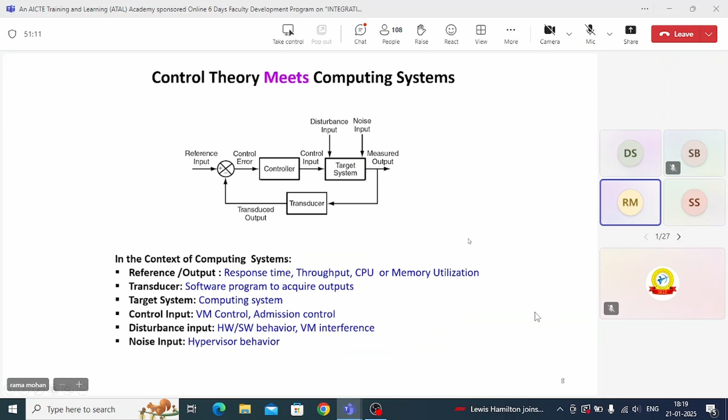And the solutions are being found day after day. So, therefore, we use control systems to have a kind of closed loop system wherein you want to see to it that any user requesting for a cloud service gets it, via some feedback loop. These are all control system basics which I don't want to get into now.

So generally a cloud setup, if you want to do it in a private space, for example in your college or possibly in a small working environment, you can do like this. So this is the architecture of the cloud.

And all these machines - the cloud controller, cluster controller, and the node controller which hosts the machines - are time synchronized by NTP service, meaning Network Time Protocol Service. Because there is information exchange between the cloud controller, cluster controller, and the node controller, they should be connected with the same network for time synchronization. Therefore we use the service called NTP.

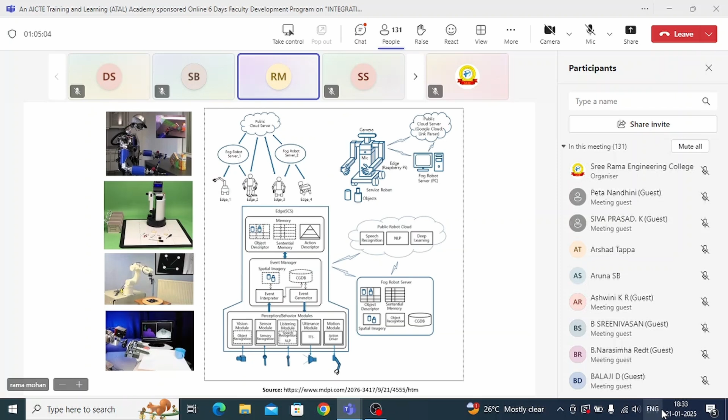So the operations could include pick and place, decluttering. Decluttering means you mix up a set of objects and give it to the robot, and it is going to separate them and give them back to you. Even though it is not a great operation to do, it is just for a certain type of training.

So now, if you want to really have an architecture for the robotics kind of environment, or a cloud robotics kind of environment, the only thing that changes is, as you can see in this diagram, there are two parts: one is pre-processing, one is post-processing. There are several robots here, and you have the robot vision data, which could include a lot of information related to the images.

That data gets pre-processed in this server called the Fog Robotics server, and is finally sent to fog computing for one layer of processing. Some part of the processing of the robot vision data could be accomplished in a fog environment, or sometimes, if it is really powerful, the whole part of it can always be processed in the fog environment. If it is not so, then you balance the load across the fog environment and the cloud environment.

Both, okay. This is the cloud environment, this is what I was describing previously - this is the complete architecture of the cloud environment. This is fog, and for each fog you can see the modules - they could be kind of microcontrollers, Arduino or Raspberry Pi. This is very transparent.

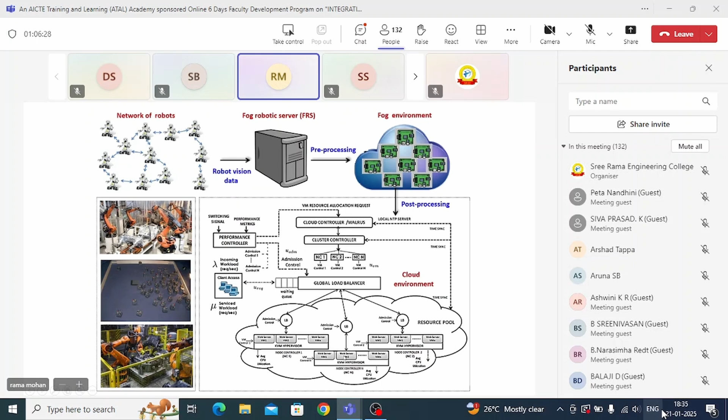Now the whole logic runs like this. The whole control loop is called sense, think, and act. That means you are sensing from the real world by means of some sensors, and then you think. Think means you are running some algorithm, and then based on that you are going to act on the system. This is what that means.

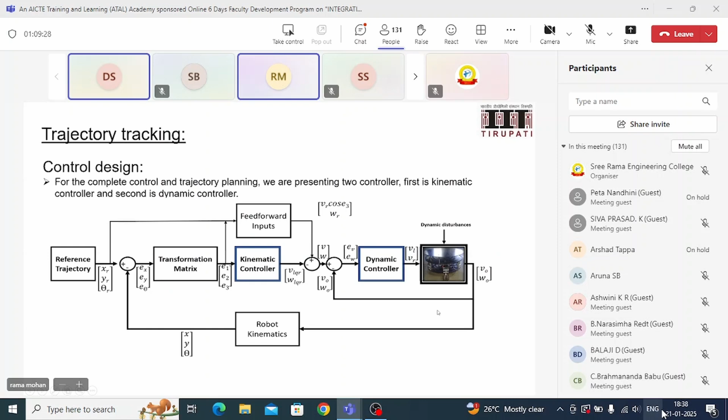This robot would carry a kind of camera which can capture the environment. That is the way we developed this application. We tried to see that we follow different paths, one being the elliptical path, and then we tried different controllers.

Even though I'm not mentioning any control logic here, for tracking we follow LQR plus state feedback, LQR plus H infinity control, or SLQR plus H infinity. SLQR means switched LQR and H infinity control. These are some path tracking algorithms which we've developed, and the error tries to reduce as we go to a more complicated controller from the left hand side to the right hand side.

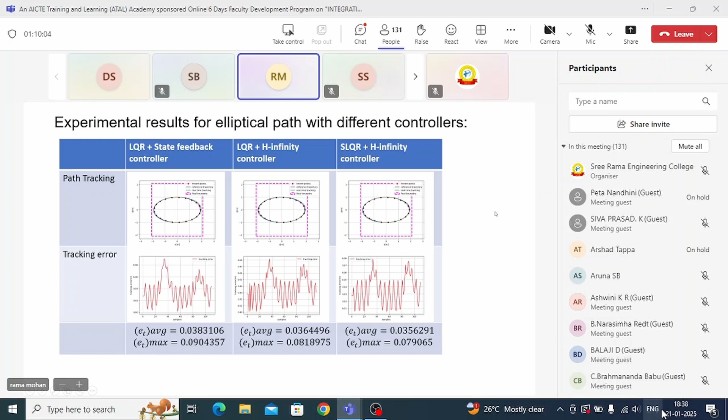For fog computing, even before we got into the shopping mall application, what we tried to do is first take a mobile robot like this with a very simple camera, and of course a computer to see what is happening from this camera. So to view what is seen by the camera, this computer is being used, and then we have certain colored balls and a Raspberry Pi.

So if you see this application, first what we did is we made a boundary like this. I hope you are able to see this slide on preliminary results of object mapping. Are all of you able to see?

So when we are using this setup, this mobile robot is given a path to trace a simple square, and in between you have these balls with different colors. What we did is we tried to move the robot from the initial position back to the final position, which is the same as the initial position, after tracing this trajectory.

So what is the difference between the results we observe? There are two types of things we have done. One is using onboard computation of the mobile robot to process the images of the environment, which are monitored at each point in time as we travel this trajectory.

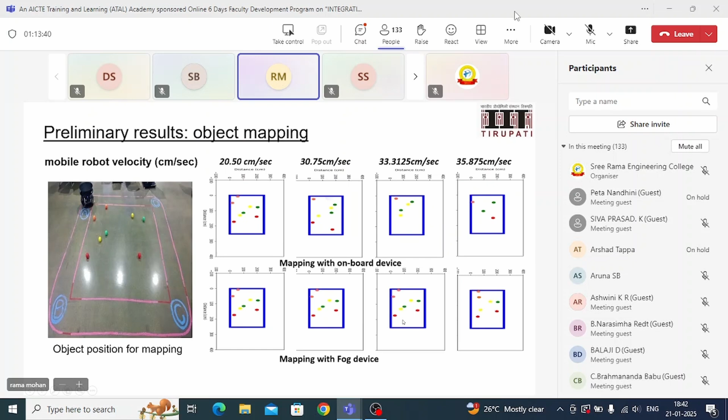Now what we see is, if I use a single onboard controller with a mobile robot in the same environment just discussed. I hope you are able to see the slide in the background, right? Single board controller and all that.

Yes sir, okay fine. So if I use single onboard controller, it means I am using the onboard computational facility of the mobile robot to capture the environment surrounding it. In such a case, processing time is much above the threshold time.

Now what I would do in such a case is distribute the image frames across several Raspberry Pis instead of just one. In that case, the amount of time required to detect an object in the surrounding of the robot is much less.

Then there is a question: why do you want to use so many Raspberry Pis here? Because the quality of the image is going to get distorted due to several things, based on the camera, based on the speed, and so on.

So all this processing has been divided into multiple AI algorithms, and all these AI algorithms are organized properly and uploaded onto each of the nodes of the fog. Node 1 is one fog device, node 2 is another fog device, and so on.

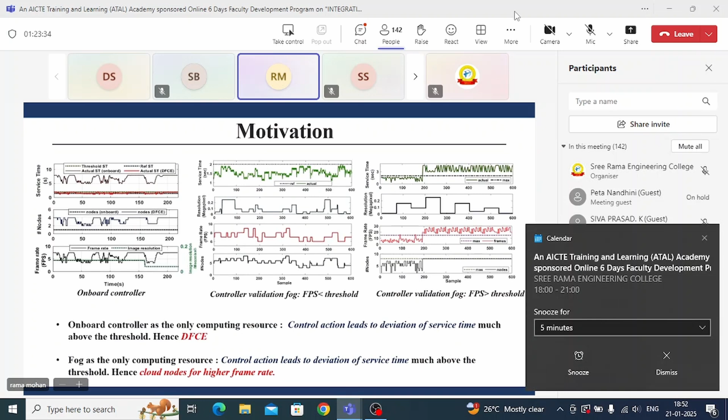So these are a couple of slides mainly focused on the theme of this FDP—the topic which I am talking about, so please pay attention. So that's what I just talked about—this is all the control part. I'll give the paper reference so that you can have a look at it.

These are the types of items which we try to train. It's not just that the TensorFlow algorithm will directly take care of detecting these objects—you need to train different types of items. There are several items, around 30 to 40 item lists, trained for TensorFlow, and they have been hosted on the fog and cloud environments. That's what we did actually.

Now this is the schematic diagram of this. I don't want to get into it because it's an algorithm that probably needs detailed explanation. But the only thing I would like to tell you is that we have developed several load sharing algorithms, used for diverting the load across the fog computing environment and cloud computing environment, so that the service time could be kept within some reference value.

Finally, what we did is we tried to run the whole thing, which is the real-time validation here. It shows a working environment of a shopping mall wherein the mobile robot moves from one part to the other. These red marks—I hope you are able to see the controller validation plots—show the application environment.

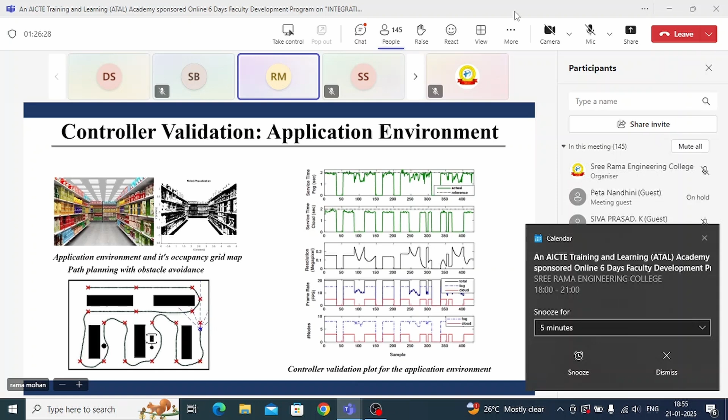Distribute this load across the cloud and fog environments. The number of nodes in the fog environment are shown in blue in the last plot here, and the number of machines used in the cloud are shown in the red plot. This is a kind of validation which we did in a shopping mall in Tirupati, and we published it in a top tier 1 journal in robotics called Robotics and Autonomous Systems. You can see the paper, I'll also share the link.

So this is a kind of control, navigation control loop which is used for the mobile robot. So what did we do here? There are a lot of things involved. We tried to mathematically model a fog computing environment, and then slowly develop a controller so that the controller understands the dynamics in which the fog computing environment changes with respect to the nature of the computing environment.

For example, the image frames are changing, image resolution is changing. How does the service time change when the number of nodes are changing? That information is captured in the mathematical model, and we describe it as an LPV model. LPV means linear parameter varying model. Right, this is what it means.

So once we have the LPV model for a network of fog nodes, which we also call the distributed fog computing environment, DFCE, or distributed computing environment, we develop this controller called LPV controller, which is linear parameter varying controller. And we do all this to ensure that we get the service time to be below a certain value.

Let me conclude this part of the lecture properly. So what did we do till now? We tried to understand cloud computing, then we talked about fog computing, which is a milder version of cloud computing. Cloud computing means virtual machines. Fog computing means we use lesser computational power like Raspberry Pi, Arduino, or a microcontroller.

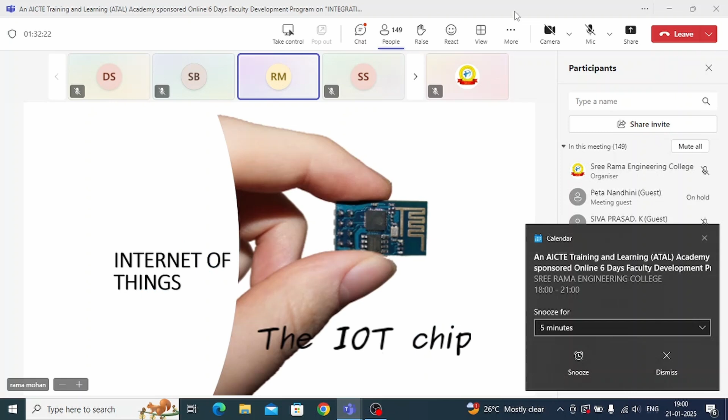Now, Industry 4.0 has come up with different kinds of industrial revolutions. The fourth industrial revolution is the current one. So the fundamental part of the industrial revolution and Industry 4.0 is the IoT, the Internet of Things. It's a simple IoT chip which we can talk about.

Now, what is Internet of Things? It is a network of physical objects, devices, vehicles, buildings, or any other items, embedded with electronics, software, sensors, and network connectivity. It enables these objects to collect information. So when you talk about the fundamental thing, that is...

You have a device. If you go 40, 50 years ago, we never had IoTs, right? We just had a simple sensor. For example, to measure temperature, we could have used RTD, which is resistance temperature detector. Now, RTD by itself cannot exchange information with any computing device, like cloud and fog, for example. Today it cannot directly interact with RTD.

Now, for example, if today you need to interface RTD with the cloud and fog, that means the information from the RTD, if we have to pass it on to a fog environment or cloud environment, what should it do? We would have to develop all the signal processing of the data which is coming out from the RTD.

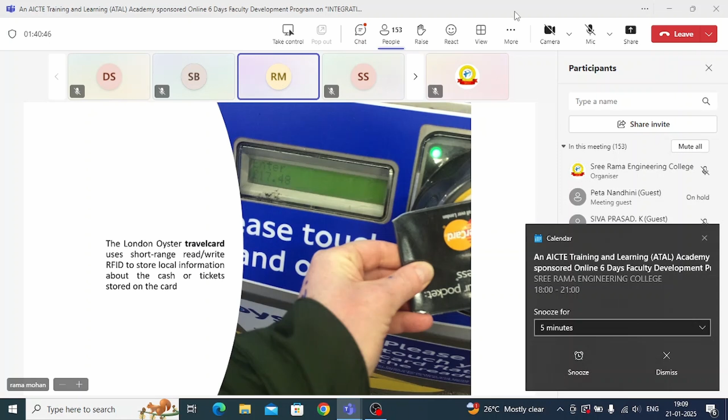So there are devices which are used for checking the location of where your pet is, like a dog. If you are having a dog with you, possibly if you want to check where it is in a given space, the network has an RFID tag and so on, for a live location tracker and so on. Then travel cards is one such thing—magic bands in Disney, wherein you can enter some places with a band.

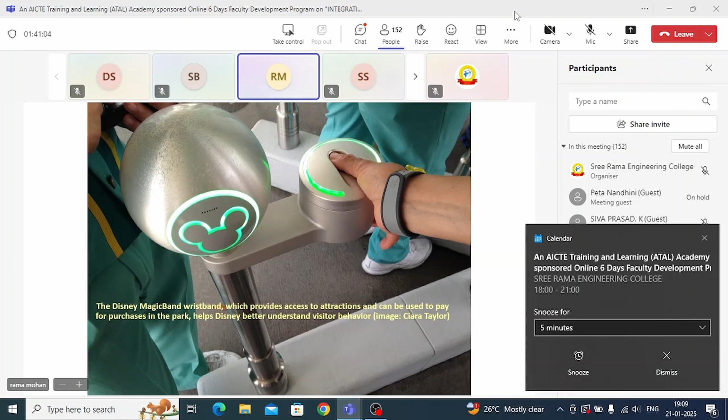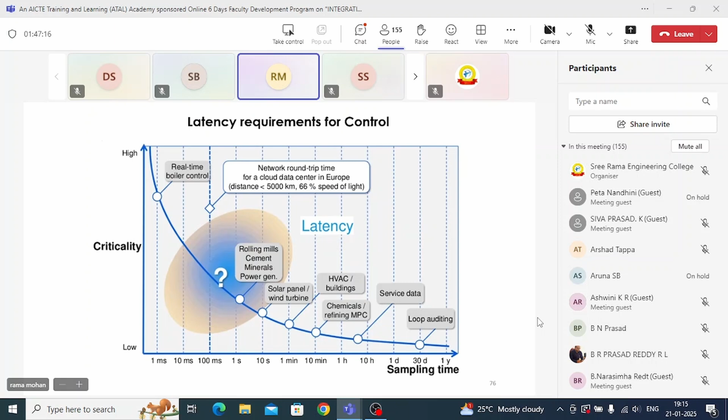Now look at the industrial automation applications. As I told you, in industrial automation we use something called advanced process control and SCADA. These two are the most important industrial applications.

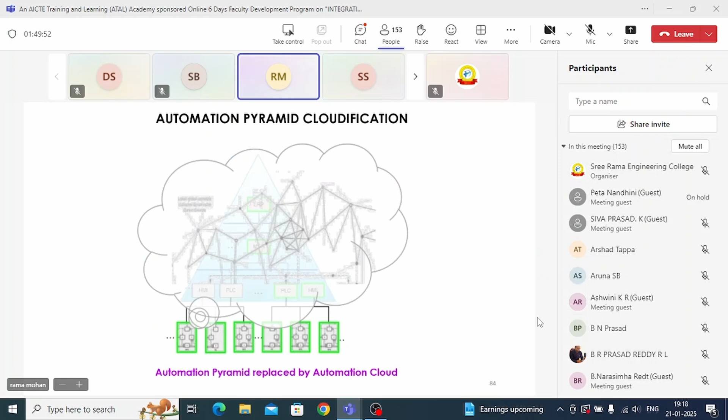So this is the cloudification of the entire platform. That means you don't have physical hardware. All the information which you get from these devices in the bottom layer is being transferred to the upper layers, where all the control takes place.

Now, if you want to do the control, it depends on the plant. If the plant requirements have low latency requirement, you can never apply cloud. If the latency requirements are high, let's say 5 seconds or 10 seconds, then of course you can use cloud, because the closed loop feedback control will require such kind of arrangement. This is cloudification.

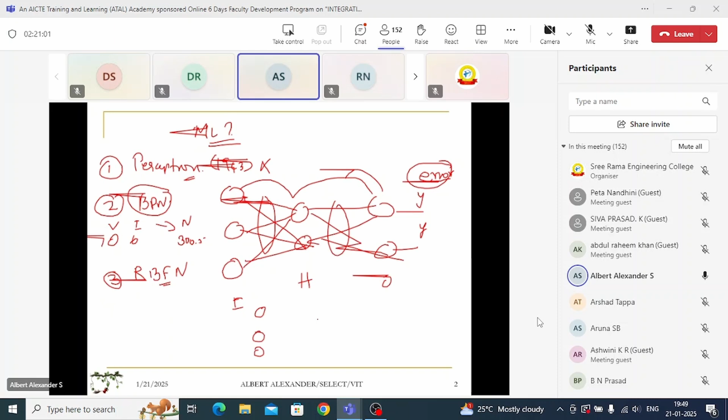The radial basis function network is similar to back propagation. It will have the input, some hidden, some output, but unfortunately this radial basis function network does not have any weight calculation between these layers. The weight calculations are made only between the hidden and the output junction. Here we never call it a hidden layer; we call it receptive units. These receptive units follow the Gaussian structure, which is multiplied with my input parameter, giving some kind of function, normally called a nonlinear function, which is helpful.

Now let's talk about LSTM networks - that is, if you're going with a time series. For example, we are not going to take just one particular data point of a battery and come to a conclusion. We will take different intervals, like time t1 to t2, for a particular battery's voltage parameter, v of t into differentiation of omega t. So omega will not come in, it's v of t into dt. For this particular thing, for the different average value, we can go for the LSTM. So the root cause for the LSTM is going to be the RBFN.

So we can work with RBFN or LSTM for these kinds of problems. For a particular range, there is one major objective, and that objective is called prediction.

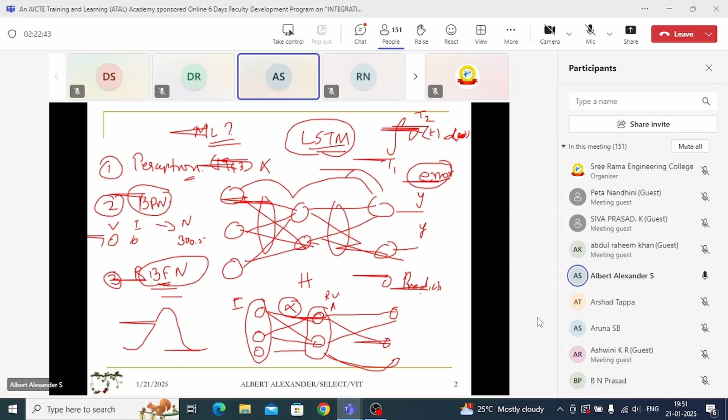You have to decide which part you are going to focus on: prediction or forecasting. Prediction is different, forecasting is different. Prediction means I want to predict whether a fault is available or not, using the present dataset and the past dataset to predict the future. That is called machine learning.

So for prediction there are some algorithms; this is normally called prediction. Forecasting means, at present you know your VA rating, and in the past you know the VA rating, and you can forecast what rating is required in 2030. That is called forecasting. So if your work seems to be forecasting, there are some algorithms which deal especially with forecasting.

So let us talk about... just a minute, I will come back, just a minute.

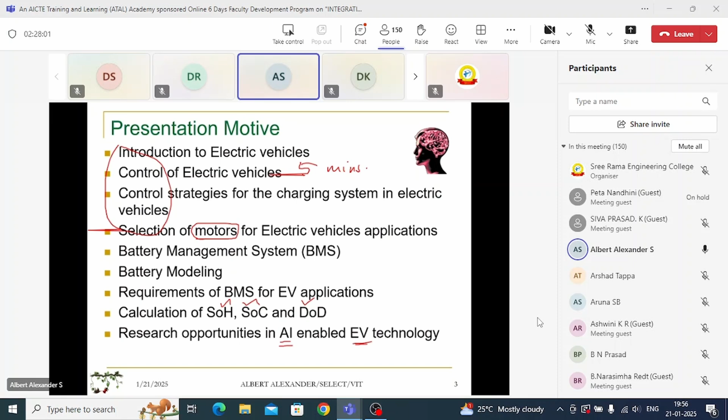So this is the introduction of what I need to deal with.

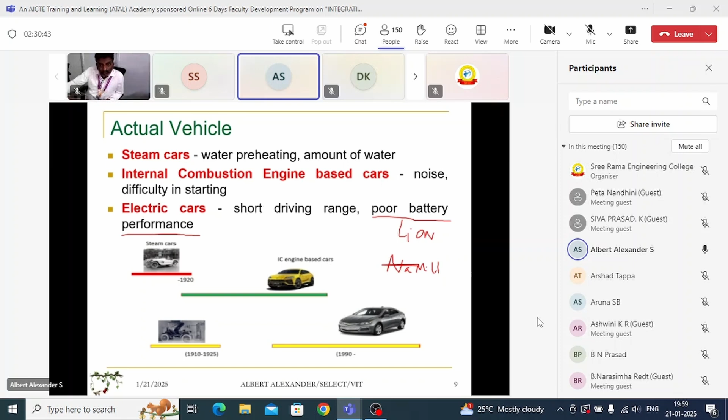So here let us talk about steam cars. One of the major drawbacks in electrical vehicles we know. As of now, in my presentation, I'm going to focus on four wheelers. The major issue is the short driving range, and one of the drawbacks of electrical vehicles is poor battery performance. Even though we use batteries like lithium ion or nickel metal hydride, these batteries have poor battery performance with respect to long driving range. That is the motive of today's lecture.

When we talk about definitions of the electrical vehicle, it's called an electrical vehicle because it uses electrical motors - that's the reason for the name. The battery electrical vehicle means one powered by battery, hybrid vehicles have both batteries and engines, and plug-in vehicles are ones that plug into the grid.

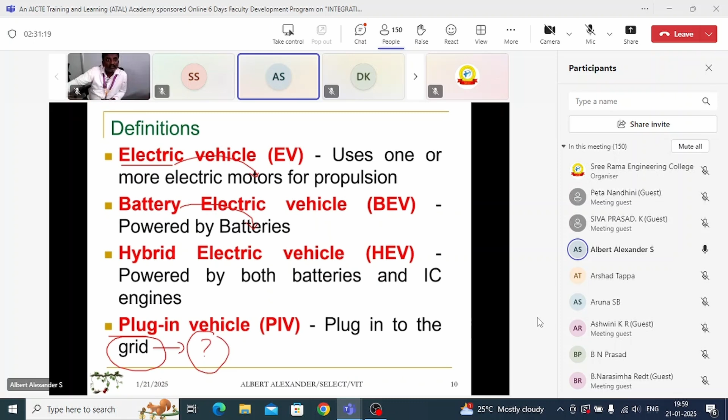I'll just make a note of the electrical vehicle and skip ahead. In my textbook, I have briefed a small history.

I will take just 2 minutes to explain the brief history of the electrical vehicle. Whatever we speak about the electrical vehicle at present, it was already developed more than 150 years ago. It is not a novel concept or idea, because whenever we publish a paper, editors expect novelty. But we should understand that the electrical vehicle, whatever we are projecting, is not a novel idea. Whatever block diagram we speak of at present is not a novel thing - it has already been developed more than 150 years ago. The only novelty we can bring is on the control side, a control algorithm, or in machine learning parameters, just to improve performance. We are not developing a new thing, just making improvements - what we normally call a fundamental or incremental addition to the available knowledge.

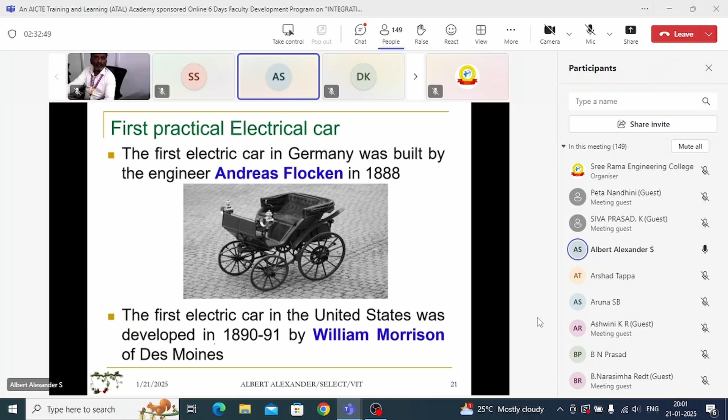Even now, I can see many research papers that come to me for review, because I'm on the editorial board of some Scopus and IEEE transactions. Some people are still submitting papers on battery swapping service stations. Even the Ola autos in Chennai use this exchangeable battery service, which they call a battery swapping system. But you should understand that this battery swapping system has an old history, more than 150 years.

We can understand that this exchangeable battery service is an old thing, but for this old thing, what additions can we use? That's what we're going to discuss, because speaking about the whole history alone will not make it a very big thing. So we can understand what merits are related to it.

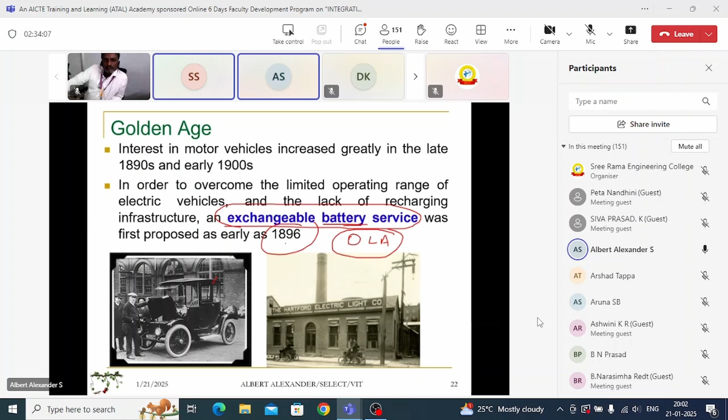Now for the dual active bridge battery charger, we are developing something around an 80 kilowatt charger, and also working with a 40 kilowatt charger. We can see the percentage level of this 40 kilowatt and 80 kilowatt we are doing. Normally people work with small prototypes, something like 3 watts, 3 kilowatts, less than 1,000 watts. But the actual requirement for the battery charger, if you want to develop it, should be 40 kilowatt or 80 kilowatt.

I will also give you sample calculations for this 40 kilowatt and 80 kilowatt. For this particular power rating requirement, we want to make use of power electronic switches, specifically MOSFETs. That's the reason many people are shifting from silicon switches to silicon carbide.

Why are we going for SiC MOSFETs? Silicon MOSFETs cannot withstand high power, that's the reason. There's no very big magic here, because the power rating level is going quite high. Why is the power rating level going very high? Well, the main reason is the motor that is available.

How do we figure out this particular motor? This will be estimated by the mass of the vehicle. How do we predict the mass of the vehicle? I will tell you with the help of a simple vehicle dynamics calculation.

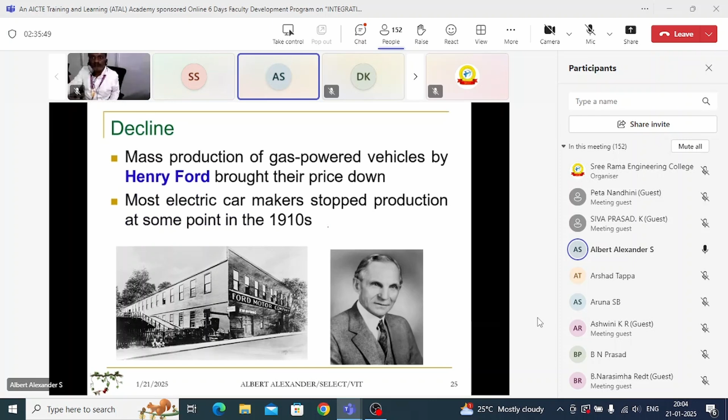The electric starter was developed in 1912, and then Henry Ford came into the picture, and the electric car production stopped. This is the small timeline history of the electrical vehicle, which started in the 1830s and dropped in the 1910s, which we normally call the golden time period for electrical vehicles.

But now comes the question: what was the need, and how did the electrical vehicle make this revival? What made this particular revival happen? I will tell you. In 1968, there was a great car race.

We want to teach these things to our students, so that they can understand what various developments occurred in the history of the electrical vehicle. Because whatever we teach at present relates back to these things.

For example, whenever we talk about electrical vehicles, we can see that the great car race started between Boston and California. It was a cross-country race with electrical vehicles, a joint collaboration between MIT and Caltech, an energy organization collaboration between these two organizations.

So here we can able to understand that this project was highly successful. They used a typical amount of batteries and 53 charging stations, which were spaced about 60 miles, and they reached Caltech. So that has been a revival for the electrical vehicle. This is myself, when I visited MIT for my postdoctoral research in the US, I visited places there having this particular thing related to EVs.

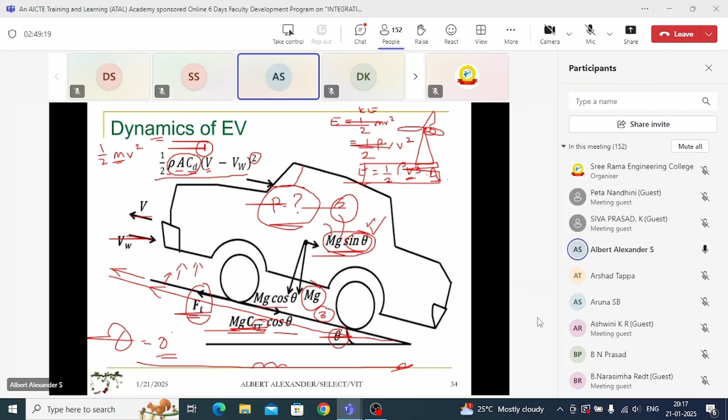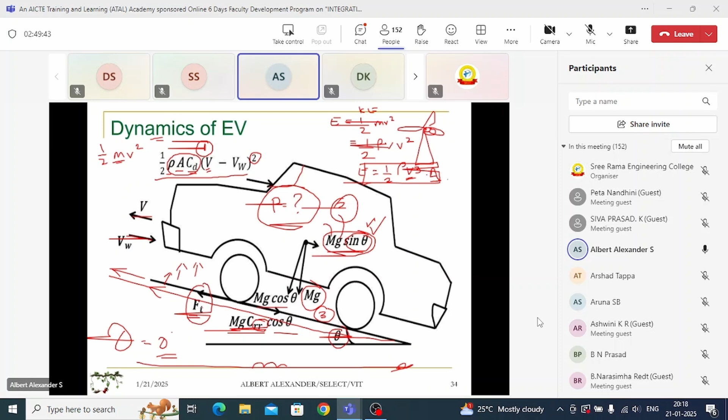So like in mini projects, we cannot just conclude that our battery is going to be something like 12 volt 100 Ah, some kind of thing — no, that is wrong. We have to decide properly based on various things. These are the various aspects related to the design of a power rating, and only then can we decide the force. Now we are going to take a force balance equation.

So the force balance equation of any vehicle will be given by m alpha is equal to Ft minus summation of the total resistive forces. Fr stands for resistive forces, and Ft stands for the traction or propulsion force.

There are three forces acting as resistive force, acting opposite to the movement of the car. When the car is moving this side, there are three forces acting in the opposite direction: force number one, force number two, force number three. I want to add all three forces, that's why I give it as summation of the total resistive force.

Now I want to calculate Ft. How to calculate the value of Ft? By this force balance equation, I can write that Ft will be equal to m alpha plus summation of Fr, because Ft means I want to calculate the total traction force or total propulsion force. So Ft will be given by m alpha plus summation of Fr, which is the total of the three forces.

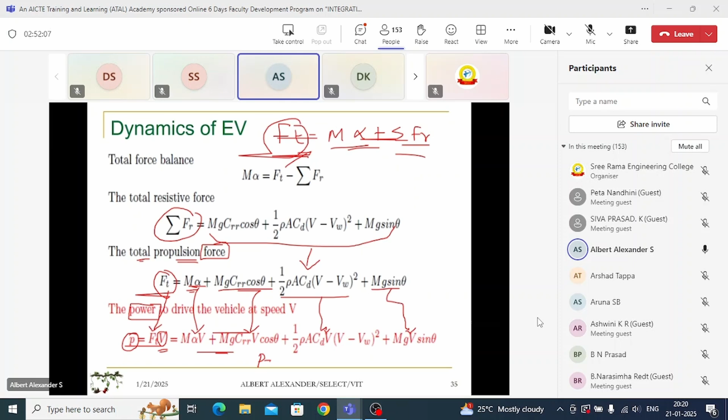This red color equation is required in order to calculate the force. Whenever you are writing a paper for any kind of vehicle, we have to include this equation to make people understand why you have taken a 40 kilowatt rating or 80 kilowatt rating of a vehicle. So for this I made one simple calculation, but I will share this presentation to Munishankar sir, so he will give it to you.

You can see that we have taken a sample calculation of mass equal to 1000 kg, and let us say speed is equal to 100 km per hour. This is our requirement. As I already mentioned, the power equation is equal to Ft into speed. So this is the equation I showed in the previous slide, and I want to substitute mass equal to 1000.

Alpha is equal to 0. For example, if you have some vehicle dynamics data with some alpha, you can substitute the alpha value also. If you substitute alpha, some 1 kilowatt will be added. For example, if you take an alpha value between 0 to 1, say alpha is equal to 1, then 31 kilowatt will now become 31 plus 1, it becomes 32 kilowatt. That's all. And m stands for mass, and gravity is given by 9.81.

A normal gravity, and CRR is a constant 0.02, cos theta means I've taken theta equal to 0, cos 0 is equal to 1, so I've not included it, and 1 by 2 is given by 0.5. Rho is air density equal to 1.2 kg per meter cube, and I want to calculate the different set of values, that is the area. The area here is given by 2 meters square, it's a frontal area. As per your vehicle design, if you want to vary the front end area of the vehicle, you can give it, and the drag coefficient, and V minus VW. Here the speed is given by 100 km per hour.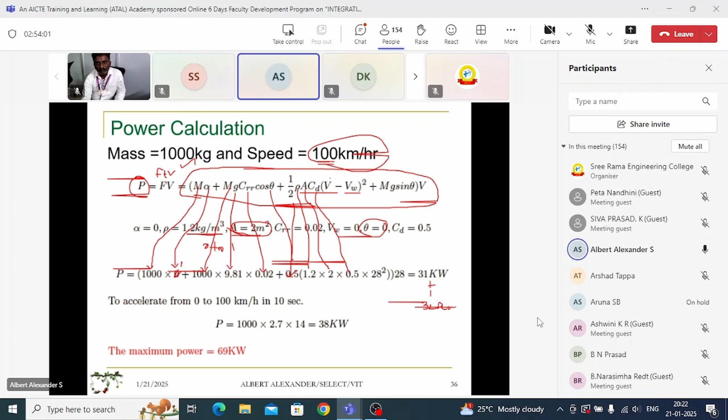So this 100 km per hour, I want to convert to meters per second, because these equations I want to talk about with meters per second. So how do you convert 100 km per hour into meters per second? You have to multiply by 5 by 18, that will give you meters per second. So you will get 0.277, multiplied by 100, you get 27.7. So I am giving it as 28.

So I am considering the speed of the vehicle equal to 100 km, and the headwind speed VW I am assuming as 0. So 100 km per hour minus 0. This 100 km per hour converted to meters per second will be 28. And then mg, m is equal to 1000, g is gravity, sin theta. Theta is equal to 0, so sin 0 is equal to 0. So I'm not going to include this particular term for the force balance equation.

And again this V, this equation is enough to calculate what is the power requirement. So the total power requirement for your vehicle, power requirement for the propulsion, is equal to 31.

So like this only, I have given the expression for the normal vehicle. If you want to make this for a different set of vehicles, you assume some parameters, and for that assumption you have to calculate. You can ask me, sir, you have given values of 31 kilowatt, or 30, or 32, or 40 kilowatt, how can you prove these are the actual values for the vehicles? I will prove it very soon.

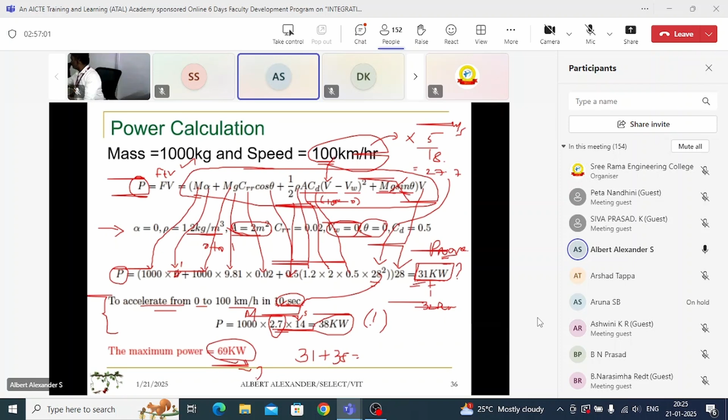So this is the initial requirement, such a way that I'm going to multiply only the available parameters, mass multiplied with my speed divided by 2, half of the speed, and then for the initial requirement of 10 seconds, that is 2.8 divided by 10, I'm going to make it 2.7. So whatever requirements we are giving, we use that. So 31 plus 38, I am getting 69. So totally, I want to design my EV for 70 kilowatt. I will prove how the calculations seem right for different sets of vehicles.

Let me skip these things. Let us say I have taken some kind of comparisons with other sets of vehicles.

I'm not here explaining how the electrical vehicle works, because everybody knows, even school-going children know how the electrical vehicle works. But here, as a research paper or researchers, what works are available? What unlimited works are available over here. I will also showcase some of the works we are doing at present, because we have only 30 more minutes, so within this time I want to give maximum inputs.

So whenever you take a Nissan Leaf, it's one of the vehicles. I will take an analysis only for the powertrain. Powertrain means which are the power components. Why is it called a powertrain? Train is not the word used for our normal loco train or passenger train. Train is a connection of components, called a train. That's all. Powertrain means how the power transfer is taking place within the electrical vehicle. So this powertrain consists of the electrical motor.

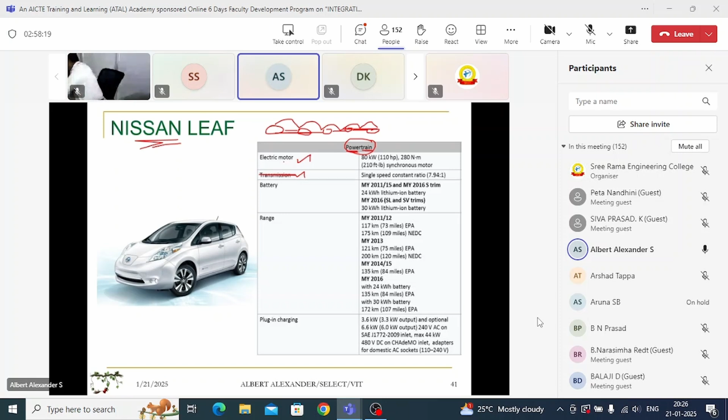We normally have an electrical motor and a transmission, how the mechanical force from the motor is given to the wheels through this transmission. For example, you're having a motor, and the force is directed to the two wheels through this transmission line, like a power transmission line. Similarly, a battery exists, with different ranges and plug-in charging options. So here you can able to understand.

Let us talk about the Nissan Leaf. The electrical motor rating for propulsion uses an 80 kilowatt motor. At present we are designing an electrical vehicle charger for the industry, and they have requested it for 80 kilowatt because of this motor rating. Similarly, the battery which helps in charging this vehicle is given as 24 kWh or 30 kWh.

This depends upon the different varieties or different models. Then there's the range, the different range estimates like EPA or NEDC, these are some of the standards for how many kilometers it can travel on a single charge. Also plug-in charging with different sockets. I will give you some inputs related to research we have done, especially on the charging sockets.

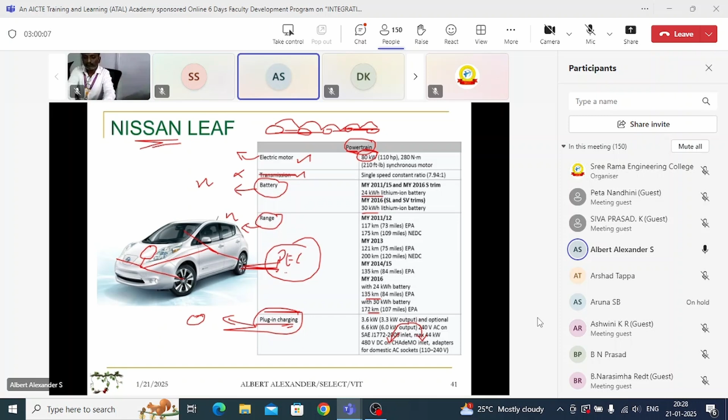So I can refer many people. You can do some work in electrical motors, transmission has only limited work, battery has n number of works, range calculation has n number of works, and especially charging sockets, the optimal choice of sockets, since chargers are required for charging this. So other than transmission, we can do n number of works. I have not included the power electronic converter in the middle because more work has already been done with the power electronic converter, so we can focus more on improving the performance of these vehicles.

Let us talk about the BMW i3. We know that electrical vehicles replace the engine with a motor, but the BMW i3 has both features, an engine is also there and an electric motor is also there. So we target only the electrical motor. We have to design the battery charging infrastructure for 125 kilowatt.

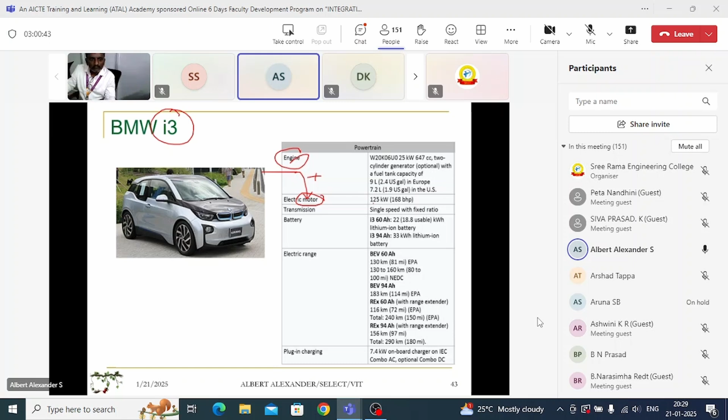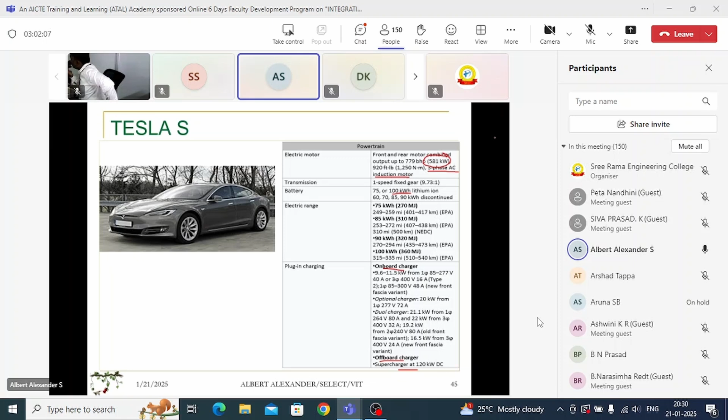Let us talk about the Tesla S grade vehicle. Here the motor they are using is a three-phase AC induction motor. For example, whenever you are teaching a subject like Machines 2 or AC Machines, you can just show that Tesla S uses a three-phase AC induction motor, with a total power rating of about 581 kilowatt. With the help of this comparison, we can understand the variation in kilowatt between all these vehicles, and make this analysis through price comparison, meaning what is the total rating. If a vehicle has better performance because it's a high performance three-phase induction motor rated at 581, and the battery is about 100 kWh, all lithium ion, with plug-in charging consisting of onboard charger, offboard charger, and supercharger available, these are the additional features that make this vehicle outstanding compared to others, because the investment for the motor is more for this type of machine.

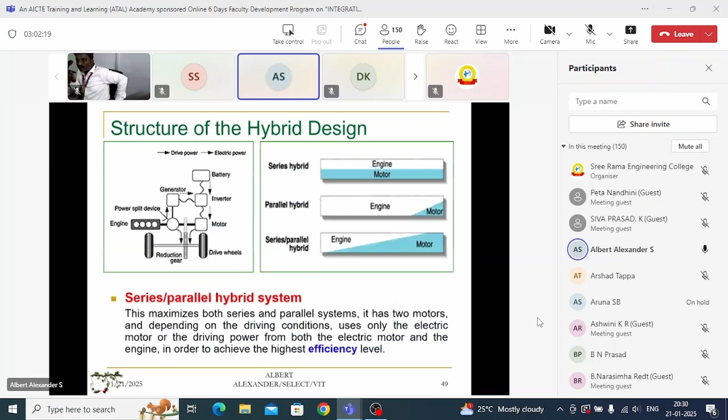So I'll just skip the design of the vehicles and the objectives of the electrical vehicle, I'll skip that basic theory.

There are two different types of charging modes, especially concerning the battery. We normally talk about the comparative analysis between slow charging and fast charging.

Slow charging always refers to AC charging pile, also called onboard charging. Fast charging means we are moving to DC charging. DC charger is faster compared to AC charging pile.

Fast charging can charge a vehicle within 30 minutes to 2 hours, whereas slow charging for the same vehicle takes around 6 to 10 hours. Infrastructure cost for DC charging is obviously high because we are dealing with multiple conversions.

Whereas for AC charging pile, the infrastructure cost is very low because directly from the grid, by increasing or decreasing, troubleshooting, or reducing harmonics, you can directly charge the vehicle. So infrastructure cost is low.

The impact on battery life for fast charging is comparatively large, because the battery itself is essentially a DC component, so the impact on battery life will be large.

Nowadays many people focus only on fast charging, DC charging and so on, but the impact of fast charging on the battery will be very large, especially on the life of the battery.

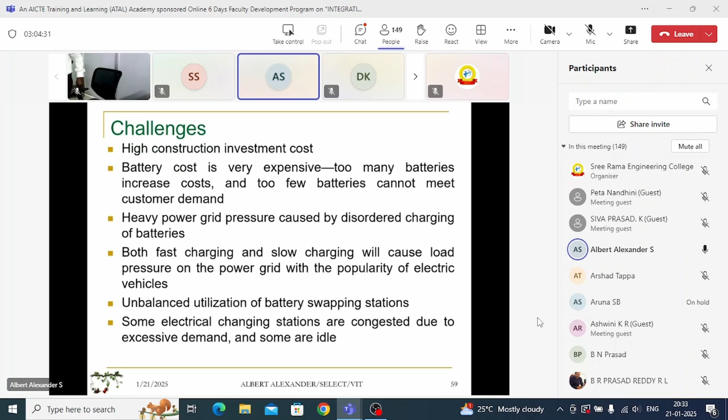In the previous session, I also heard some questions related to energy storage systems. So I have made some kind of review for energy storage systems, especially for batteries.

What are the major types? Batteries, ultra capacitors, and flywheels. We have to understand the difference between these kinds of elements.

As far as electric vehicles are concerned, we talk mainly about batteries. Sometimes we talk about the ultra capacitor, also called super capacitor. We cannot say that ultra capacitor or super capacitor are going to be an alternate for battery. No, that is a wrong concept.

We cannot neglect the battery and just use the ultra capacitor instead. The ultra capacitor's role is limited such that it can be used for three major processes. One is whenever you want an initial pull.

For example, when your vehicle is heavily loaded, you need an initial high torque to be given. At that time the battery cannot provide it, because it has a specific energy capacity and power capacity, but the power capacity is very less in the battery. So these ultra capacitors are very much used whenever you need a high pulling torque at the initial excitation. That's the first use.

The second use is that ultra capacitors are highly used when driving in hilly areas. In hilly areas the gradient level is going to be very high, and the battery power may not be sufficient for pulling your vehicle up the hill. So for that, we can go for ultra capacitors.

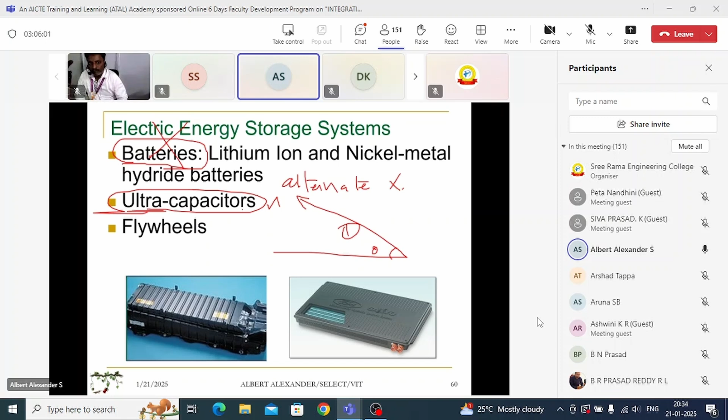When we talk about energy storage system classification, I can even ask people to write a review paper, or a work paper, related to the different comparison analysis of energy storage systems. For EVs, we always start with electrochemical batteries.

These electrochemical batteries are classified into two: classical batteries and flow batteries. Classical batteries include lithium-ion batteries for electric vehicles, nickel metal hydride batteries, sodium ion batteries, or lithium sulfide batteries. In earlier cases, lead acid battery, lithium polymer battery, sodium nickel chloride, or nickel fluoride battery. Vanadium redox, or zinc and bromine battery, these are called flow batteries.

For example, many times when I'm taking classes for school students, they ask me: uncle, you say there are satellites moving across our globe, the universe. What batteries are they using?

Why don't we use those batteries that are useful in space for our ground level EV requirements, in order to increase the life durability of the batteries?

Whenever I think about those kinds of things, the batteries used in space stations should have a long shelf life and also tackle those kinds of environments. Normally vanadium batteries and zinc bromine batteries are also discussed among many kinds of batteries. There is a separate book, the Handbook of Batteries, easily downloadable on Google, an open source book that anybody can write because it's a combination of different things. We should understand how the battery works.

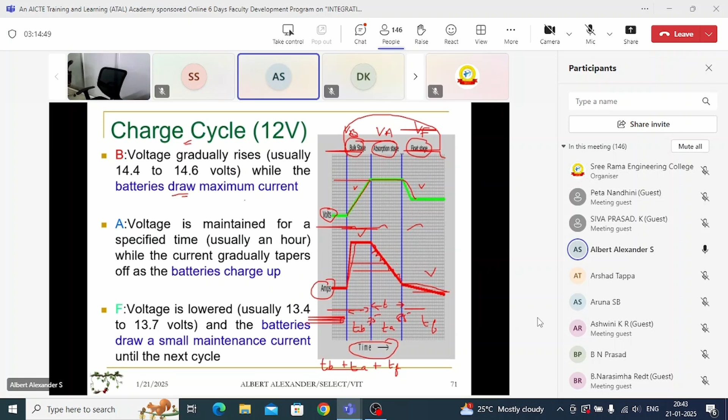With the help of machine learning, you can acquire these parameters and predict what kind of charging levels and charging mechanisms we can focus on in this particular domain. It's quite interesting. So now I can show these different versions.

Another important challenge of the battery is the work I'm doing at present. Earlier we did some work related to determining the battery state of charge. The work I'm doing now is developing abuse-tolerant batteries, which I normally call self-healing batteries. That is, I call it abuse tolerant.

What is meant by abuse? Abuse means a disturbance. For example, let's say you have a battery and you introduce some kind of disturbance. Even with that disturbance, figuring out how to make the battery continue to operate is called developing abuse-tolerant batteries. For that, we use power electronic actuators, sensors, and a closed loop mechanism to visualize which elements are abusing the battery, and how I can prevent the battery from these abusing conditions. That is called abuse-tolerant batteries.

And finally, recyclability of batteries.

If you have time, or if you're visiting IIT Madras, they have a Center for Battery Engineering, CBEEV, you can just Google it. Its office is also located in Hyderabad. CBEEV stands for Center for Battery Engineering and Electric Vehicles.

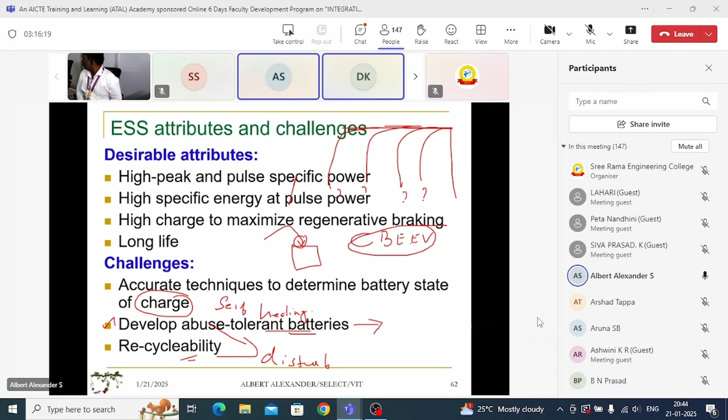Recyclability means taking the available batteries, the faulted batteries or those that have completed their life cycle, and analyzing them by taking away the individual components like anodic components, cathodic components, the separator, salt separator, and other plastic components, to see which things can be reused. They are working on that.

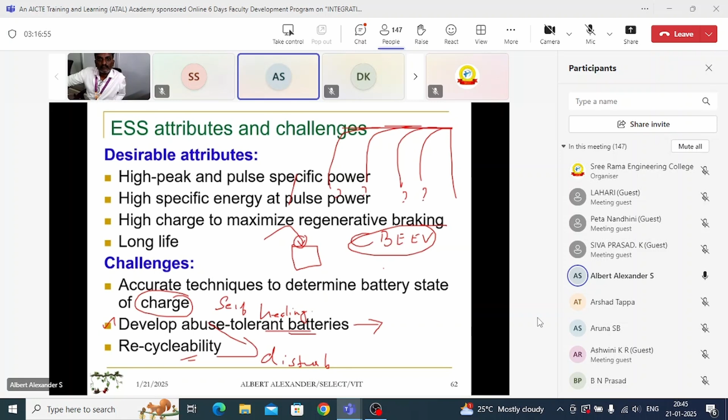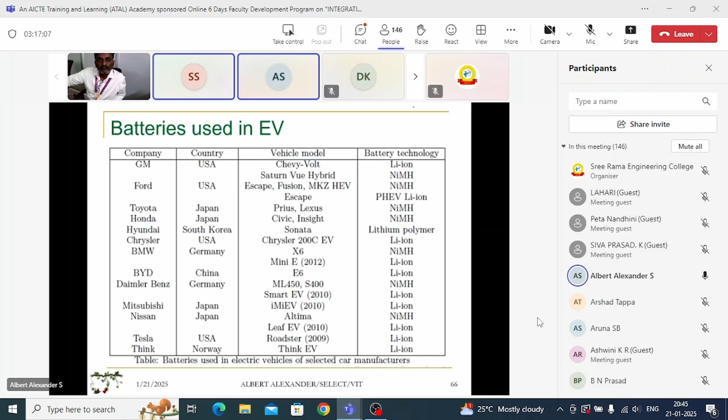So these are some of the challenges, especially in battery management systems. Let me give some direct definitions. These are some of the batteries used in electrical vehicles, especially with different models. Let us talk about lithium ion and nickel metal hydride. I'll go across some definitions of the battery before we discuss the typical work we have done.

This particular battery initially consists of a cell, then cells make up modules, and the total pack is what we call a battery. The battery has two different ratings: one is called voltage, which we all know, and the other is ampere hour.

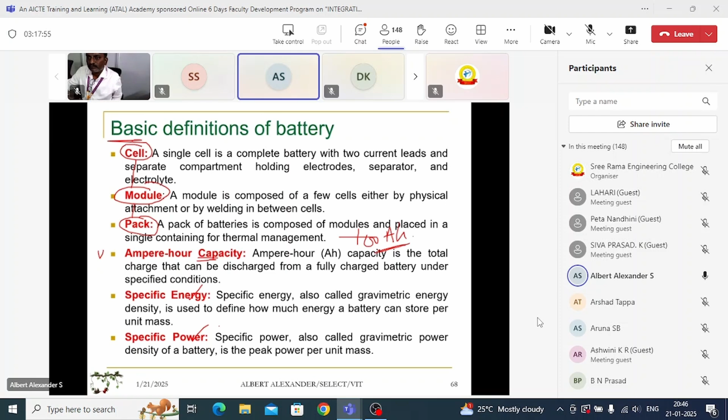Ampere hour means, let us take a 100 Ah battery, and how this ampere is delivered to the load, that is called the 100 Ah rating - how it can be discharged from a fully charged state under specific conditions. Specific energy and specific power are defined depending upon the size of the battery, which we call unit mass. Energy density and power density can be calculated in watts per kilogram.

We normally talk about the internal resistance of the battery. This plays a major role while plotting the mathematical modeling of the battery. This internal resistance changes for both charging and discharging intervals, and also changes for various operating conditions. So whenever we make a mathematical model of the battery, this internal resistance should be a variable parameter, a variable resistance, such that it varies for charging and discharging.

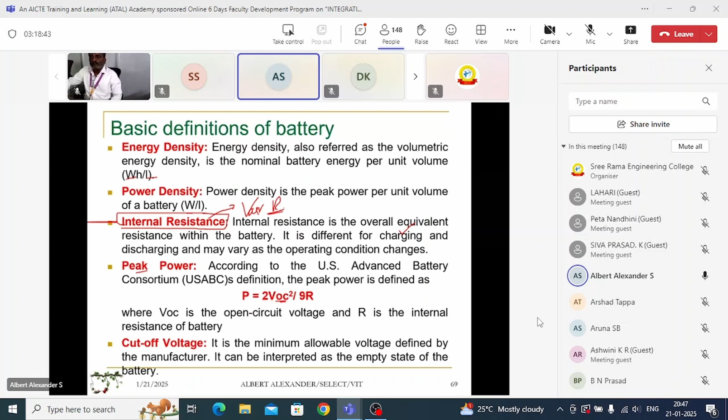Let us talk about the peak power of a battery. According to the definition given by the US Advanced Battery Consortium, the power will be equal to 2 into open circuit voltage square, divided by 9 into R.

The open circuit voltage will be the maximum voltage that the battery can withstand, not the peak voltage. We normally talk about the open circuit voltage. Even if you draw the characteristics of a solar PV, similarly for a battery, open circuit voltage seems to be the maximum voltage. Only then does the peak voltage come, on the X-axis - open circuit voltage is the maximum, then only the peak voltage.

After this is normally the short circuit current, and then the cutoff voltage. We have to note this cutoff voltage while designing battery chargers. This cutoff voltage is usually defined by the manufacturer, and it is interpreted as an empty state of charge.

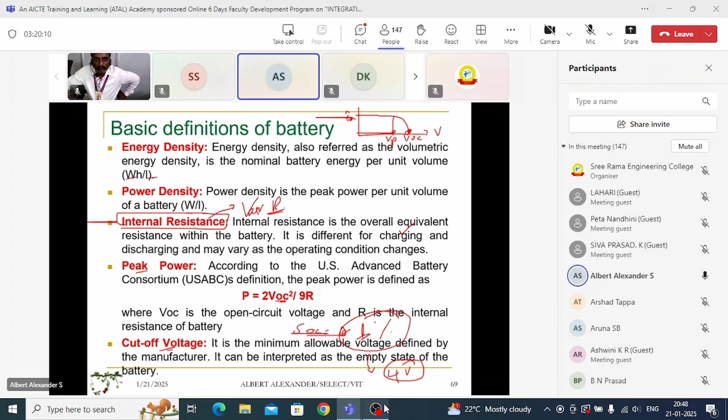For example, some people say their battery shows state of charge equal to 1% or 2%, yet the battery is still functioning well - the mobile phone functions well because according to us it's 1%, but according to the manufacturer it's not 1%. Some level is still available, something like 4 volts or 5 volts remaining, just to safeguard the battery. That remaining level is the cutoff voltage - the cutoff voltage is set by the manufacturer.

So state of charge can be calculated as the remaining capacity of the battery divided by the rated capacity of the battery. That's even what we see in our mobile phones.

If you are seeing 60% on your mobile phone, that is the remaining capacity of the battery, but we cannot say we can make use of all that 60% - it's subject to conditions like load current and temperature. Whatever we see in a laptop or mobile phone is called state of charge. Depth of discharge means the actual charge that has already been used and discharged. So 60% remaining means 40% has already been discharged - that is called DOD, calculated as 1 minus 0.60, which gives 40%.

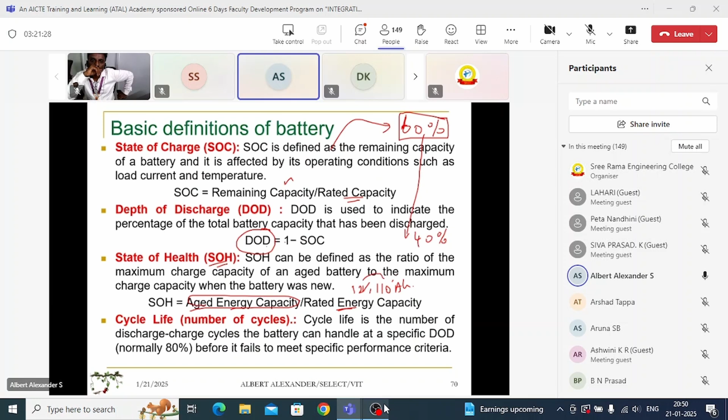Now we can understand state of health, which is my present work. State of health can be defined by comparing the aged capacity of your battery to its rated capacity. For example, rated capacity may be given as a 12 volt, 110 Ah battery. For an aged battery, you measure the energy - taking voltage, amperes, and hours - and divide by these parameters to calculate SOH. It does not mean it will give the rated value of 12 volt or 110 Ah when checked.

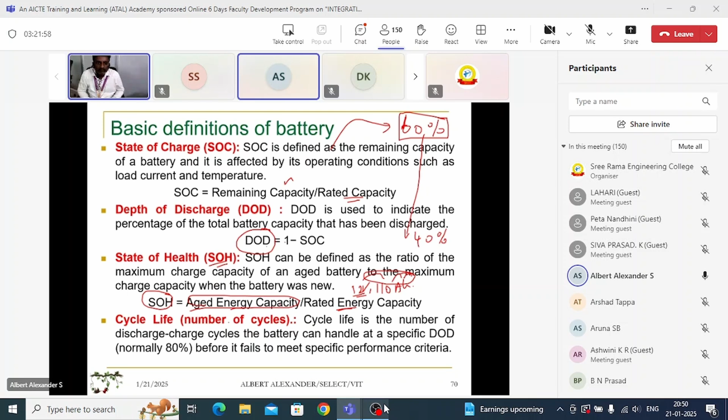Number of cycles refers to the total number of charging and discharging cycles a battery is designed for. Certain batteries are designed for 5,000 cycles, others for 3,000 cycles. When the cycles are completed, that's all - the battery life has ended. This is a normal thing, and we call it cycle life.

We already discussed the charge profile. Now let us talk about EV charging schemes. There are various schemes - normally charging levels are classified into three types: level 1, level 2, and level 3 charging. Presently we work with level 3 charging for industry, which is about 40 kilowatt rating. Level 1 charging is about 3 kilowatts, meant for two-wheelers where motor capacity is very less. Level 2 charging is based on the power calculation we discussed earlier - based on that calculation, we decide which charging level to use.

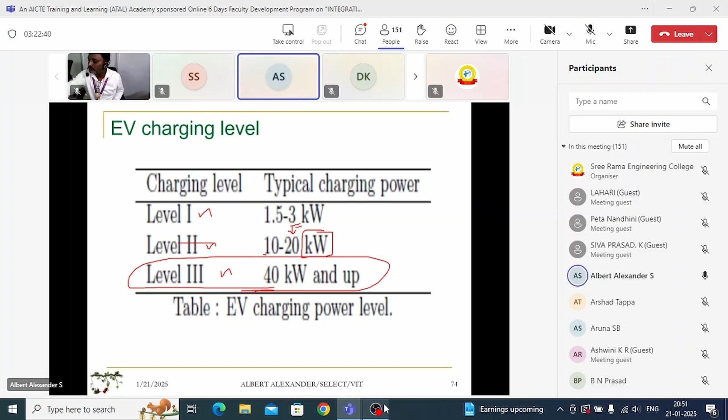I will be showing some of the publications recently - many are available on EV. I will show some publications we have done recently on electrical vehicles. This is one of the publications: a comprehensive assessment of electrical vehicle development, deployment, and policy initiatives to reduce greenhouse gas emissions - what are the opportunities and challenges. You can see some journal article details here.

It was received in April, accepted in May, published in May - now it's not possible, it takes much more time. I'm just making a small note to help people understand when certain papers were done, because it's a full length paper. I'll show you how the receipt and acceptance were done within a month - received on April 2 and accepted on May 12, that's within a month, and published on May 16. So within 1.5 months, the entire process was completed.

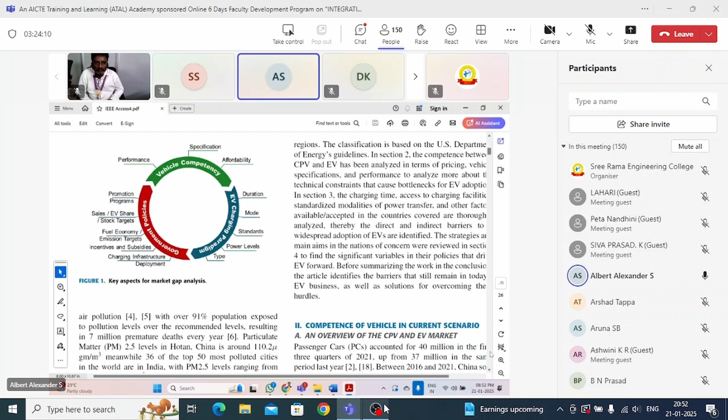In this particular paper we discussed various challenges and policies - we took a review of different policies across various countries.

Okay, so related to the vehicle performance, we have taken the capital running cost of most countries. This is a review paper where we have divided the various topics among the authors, and we have taken this particular paper. One person has taken the China-based vehicles, one has taken US-based vehicles, and we made a complete analysis of the specifications, power transfer models, and different charging mechanisms.

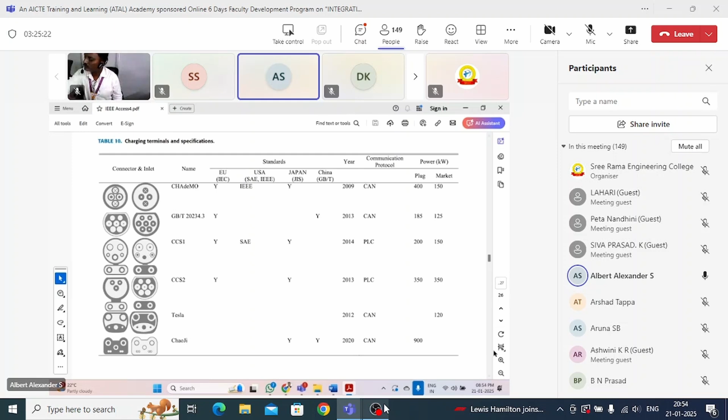This is what I want to discuss: charging terminals, what are the different terminals, such that different kinds of electrical vehicles have been using, how the sockets look like, how the connector inlets look like. And this is the government policies for electrical vehicles. We have taken the policies given by China, US, Japan, and also India, and we made some findings, and finally we concluded this particular thing.

So here, this paper does not have any work; we made a comprehensive review on the different aspects. I will show one of the papers that has been published in IET, that is Electrical Systems in Transportation.

As I already mentioned, that is how to develop a paper by making some vehicle dynamics. Here we have made a vehicle dynamics for the EV in the college campus. We have taken one college campus as a reference, and for this particular college campus, we have taken one vehicle dynamics, a complete EV-based system. So we have developed this particular thing.

Again, we have taken one IEEE Transactions on Energy Conversion paper. Here we have worked with abuse-tolerant batteries, and we have used a deep learning method. I will show the deep learning - this is a deep learning method.

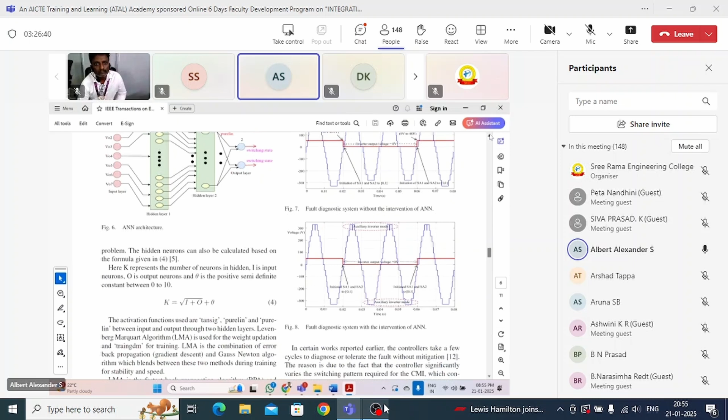We have used two different hidden layers, which will be considered as a deep learning network, typically with input and output layers. We have made a corresponding analysis such that even in a fault environment, this particular system will work.

So we have taken one appendix such that we have taken the different solar faults, and more especially inverter faults, and finally we have also taken the battery faults. So in the battery, how we have analyzed the fault, how we have tested for similar kinds of things.

So how we have initiated this - overcharging means the battery can be affected by two means. One is called overcharging, one is called over-discharging. Overcharging means even if the battery is charged 100%, if you are still charging the battery, that is called overcharging. Over-discharging means even if it reaches 0%, it is discharged completely - even if it reaches the cutoff voltage it still discharges - that is the way you are going to damage the particular battery.

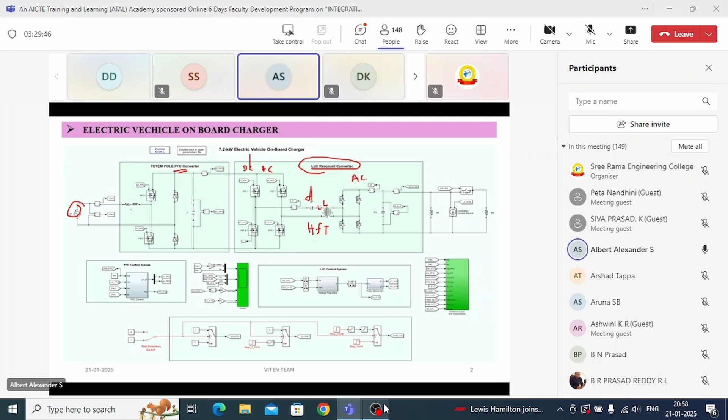LLC means I need to have an L and C, LLC resonant converter. So this converter will be converting DC to AC, and this is the high frequency transformer. After that, this will convert AC to DC, and then it will be given to the battery. We made some analysis with detailed code for calculating the closed loop mechanisms for varying these PI controllers.

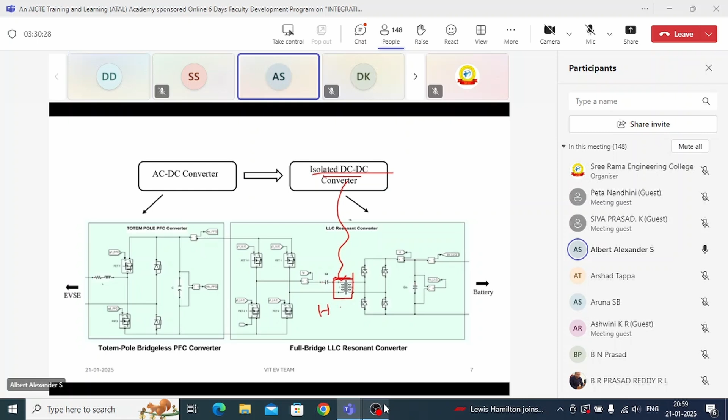Okay, so we have used an isolated DC-DC converter. The major task over here is we are working with the design of HFT, the high frequency transformer. In MATLAB also, I will show you some of this.

So this is some of the LLC resonant converters. Same thing, for the open loop and closed loop mechanisms we have developed, for calculating the different values of C, because LLC consists of 2 L's and 1 C.

The resonant tank will be the heart of the LLC converter. So we determine the frequency dependent behavior. We are working with the soft switching of the converter. Soft switching means either ZVS or ZCS, meaning I want to control the switching on and off at zero. I want to predict exactly the zero voltage switching.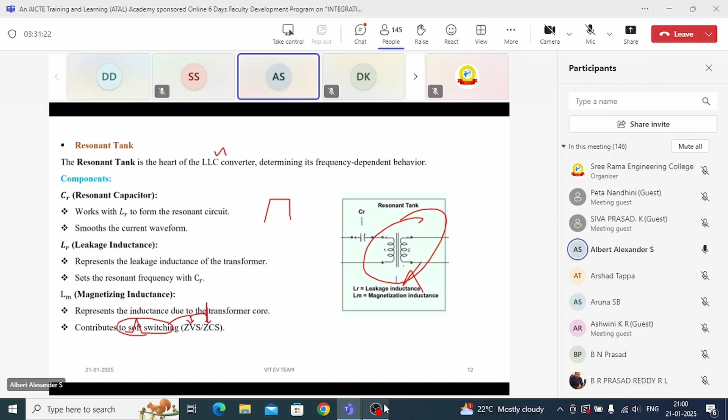Many people will ask this question: for a DC to DC converter, why do we use this transformer? Why do we want to use this transformer? We use it such that the magnetizing inductance of the transformer will help us determine the soft switching. For configuration of soft switching only we are using this high frequency transformer, and also for bidirectional power flow.

So many people will ask this: for this particular battery charger, you have one AC, you convert to DC with a rectifier, you use a DC to DC converter, a buck converter or boost converter, and directly give it to the battery charger. This will work, but the performance is a very big question mark.

So to overcome the normal buck converter or boost converter, we are proposing the LLC converter and also the dual active bridge converter. The difference is the dual active bridge converter will perform bidirectional power flow between the battery and source, but the LLC converter contributes only unidirectional power flow. So we are making a paper comparing these two, LLC and DAB.

And how in the DAB, this transformer contributes for ZVS and ZCS. Because many people are working with ZVS and ZCS, especially for the battery charging mechanism, for battery management systems - zero voltage switching and zero current switching. How can we achieve that? Who will help us achieve this zero voltage switching and zero current switching?

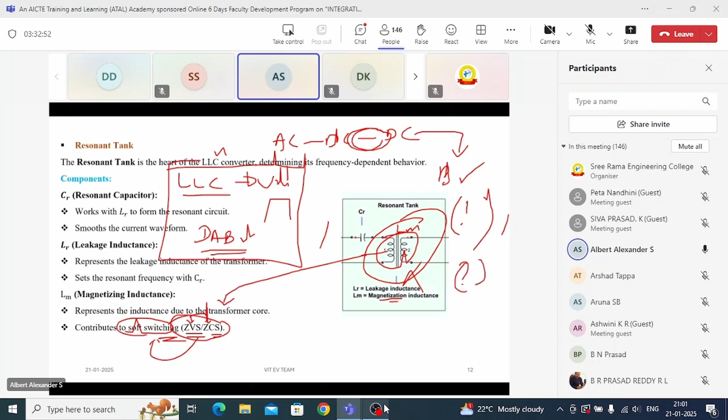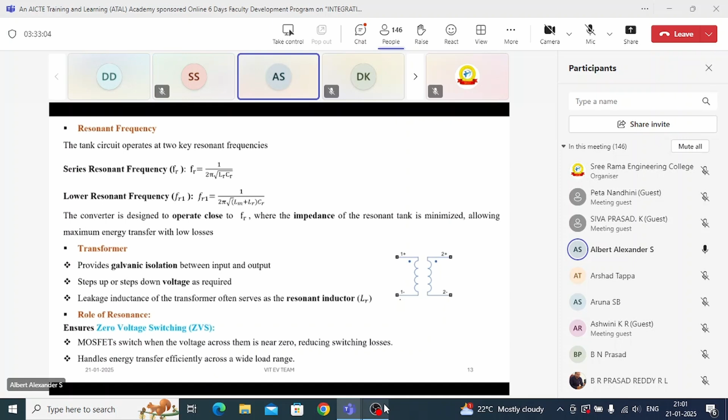The only thing that will help us is this LM, the magnetizing inductance. This LM will contribute to our ZVS switching, zero voltage switching. I will show that also. So we have been able to calculate the role of resonance - whenever the MOSFETs switch, when the voltage is near zero, we are going to reduce the switching losses, and we can achieve a wide range. So we have worked with a different kind of closed loop system.

Normally in the ZVS procedure, why do we want to go for zero voltage switching? Normal switching is enough, so why zero voltage switching? Because it reduces the losses. So I want to achieve zero voltage switching. How can I achieve it? Using the resonant tank, that is, the transformer available. That's the reason I'm using a high frequency transformer - to make use of the magnetizing inductance. Why use the magnetizing inductance? To reduce the switching losses. Why reduce the switching losses? So that I can achieve the ZVS. So that is the procedure.

For this particular purpose, we have made a detailed calculation for the switching dead time. If you're interested, I can also derive a dead time calculation. So that means you have the first switch, second switch, third switch, and fourth switch. Dead time interval means what is the time between turning off one switch and turning on the next.

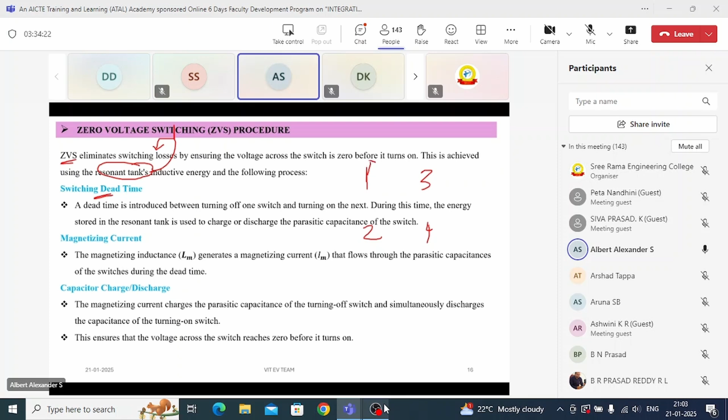For an example, I'm turning off this particular switch, and I'm going to turn on this particular switch. There will be some time delay between this off time and this on time, because I'm taking this as a control action. So what is the time that is produced between these two intervals, between off and on? That I call dead time.

So during this dead time, what will happen? The energy that is stored in the inductance Lm will be used to charge or discharge the parasitic capacitance of the switch. For an example, the off switch means it will make some charge, and it will discharge; the on switch means it will make some discharge, like that. So this Lm that is available in the tank circuit will be helpful for charging and discharging the parasitic capacitance available in the switch, especially during the turn-on time.

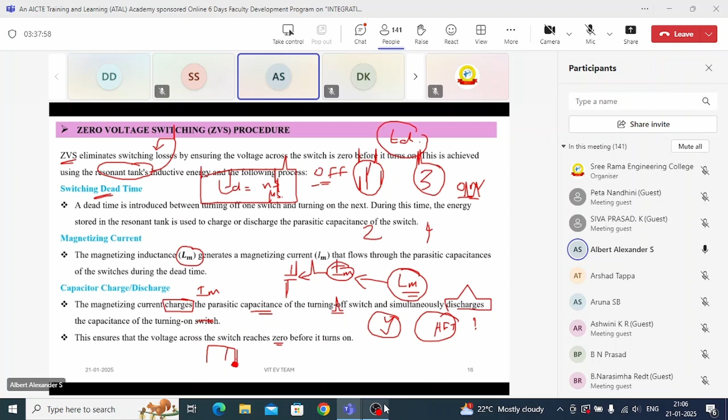I want to make an estimation of when the voltage across the switch is 0, in order to make it turn on. What will happen if I turn on the switch before the voltage across it reaches 0? There comes the losses. So in order to cope with this time delay for the continuous procedure, we make use of zero voltage switching. Zero voltage switching simply means I want to switch the device where the voltage across the switch is equal to 0. That's a very simple definition, but at the micro level, what is happening over there is with the help of the transformer.

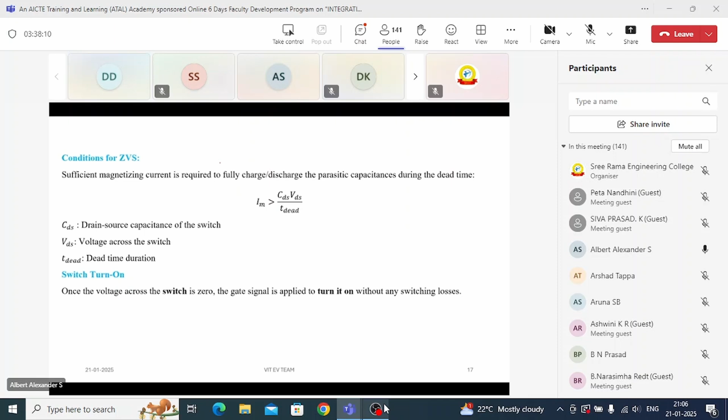Yes, sir. Ask me, so nothing, sir. Okay, someone turn on and unmute.

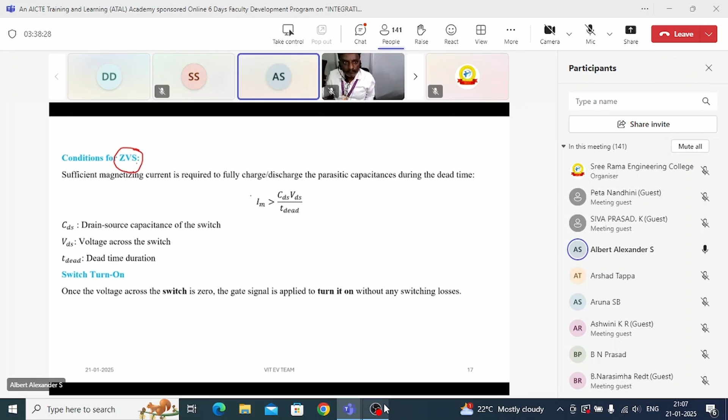Let us talk about the condition for ZVS on the DC to DC charger. If you want to achieve this, the magnetizing current should be greater than the value of the drain source capacitance of your switch. So I can manually calculate the value of IM, because I want to satisfy this particular condition.

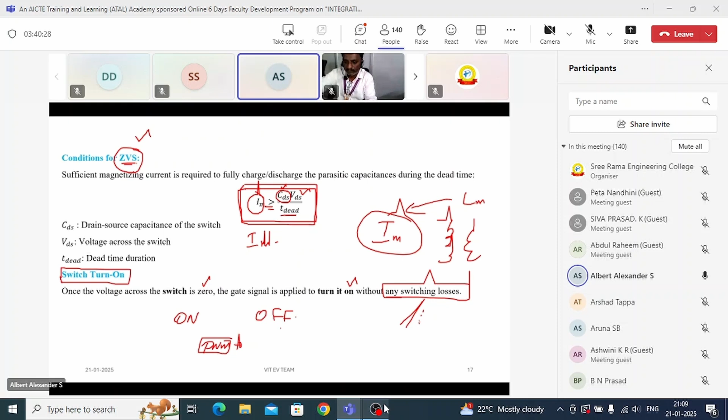There we are discussing about analog PWM and digital PWM. Turning on the device and turning off the device is very easy. Even in MATLAB, or even if you want to implement the hardware, you just need to purchase IR2110 and TL494, that's all. You can generate a PWM with the help of these two ICs.

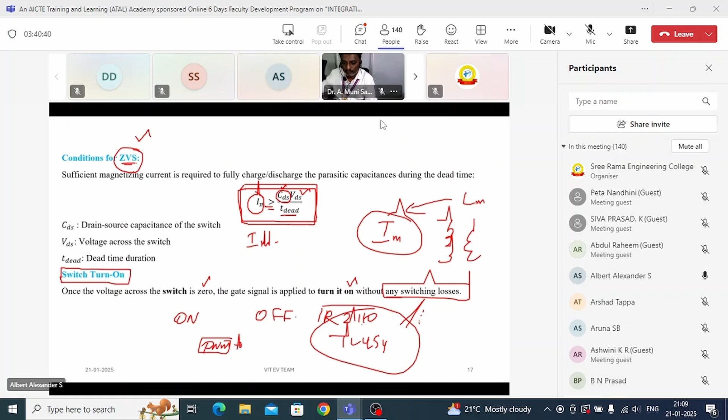But I want to turn on the switches in such a way ensuring that there should not be any switching losses. So to overcome the switching losses, these kind of DC to DC converters have this resonant tank circuit. So these are some of the output waveforms.